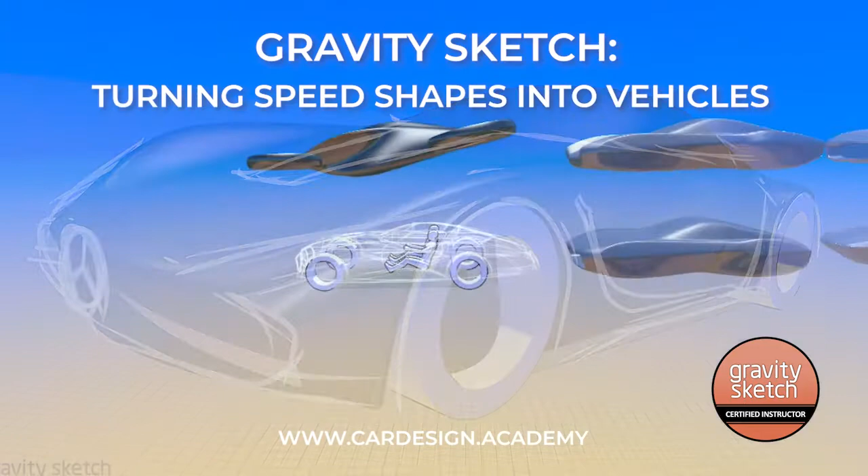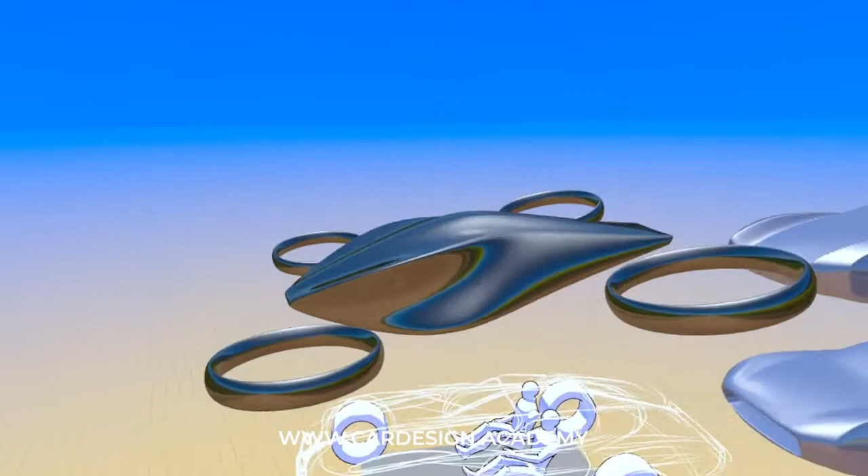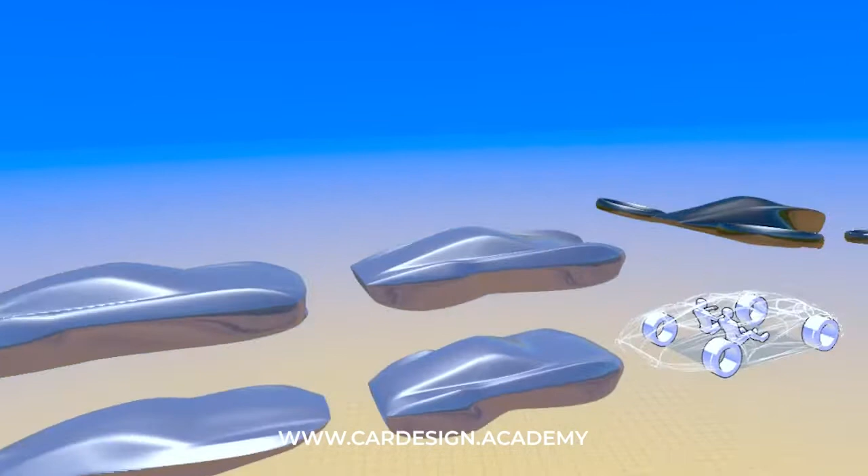As you can see here, in my earlier demos, I did a series of form studies based around this 3D sketch of a future Mercedes SL Coupe, also incorporating a form study I did for this manned aerial quadcopter. I started with form studies based on the original sketch, which have a very familiar automotive look, then started incorporating some of the form studies I did for the aerial vehicles, which are a bit more adventurous.

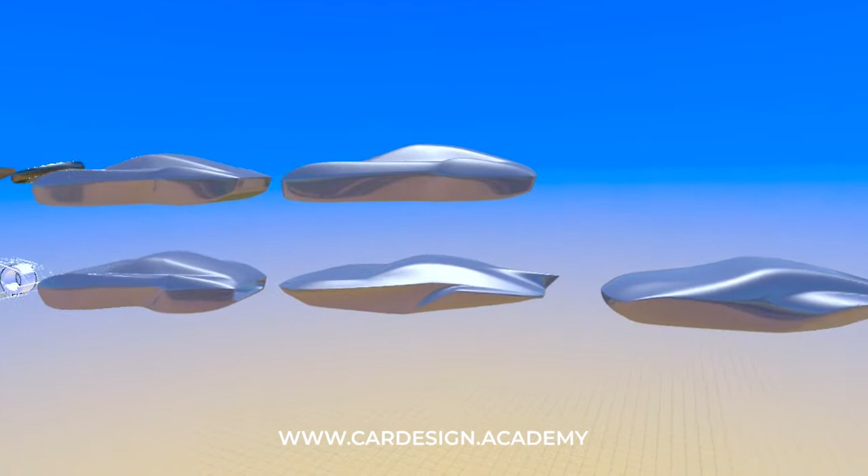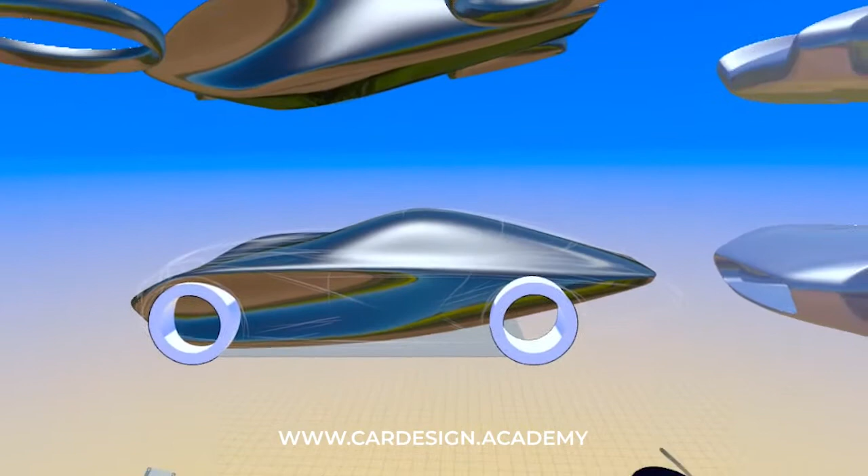I wanted to come up with something super elegant but more futuristic and innovative. So I landed on this sketch here, where I literally took the form of the aerial vehicle, my favorite of the three, and just morphed the dimensions to the sketch, so now it accommodates the two occupants of the coupe.

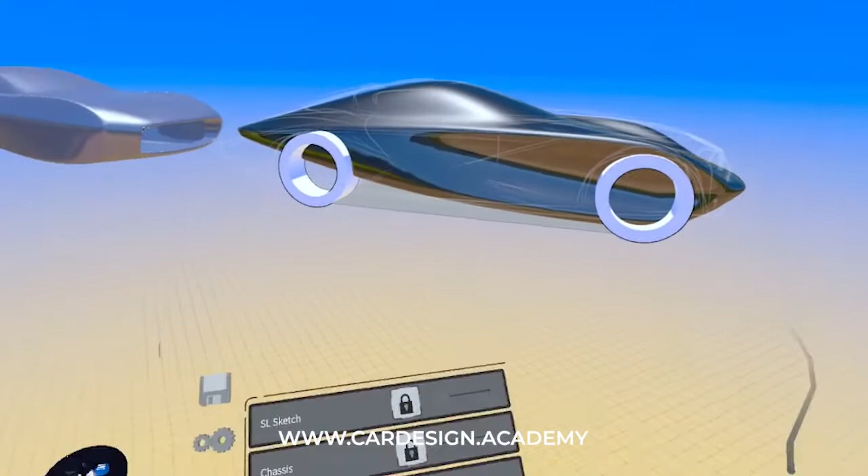In this demo today, I'm going to show you how I'll develop this into a full, complete vehicle, starting with how we control the wheel arches. I'm going to turn off the form studies and turn off the original sketch layer. As you can see, I've got this very simple, very elegant shape.

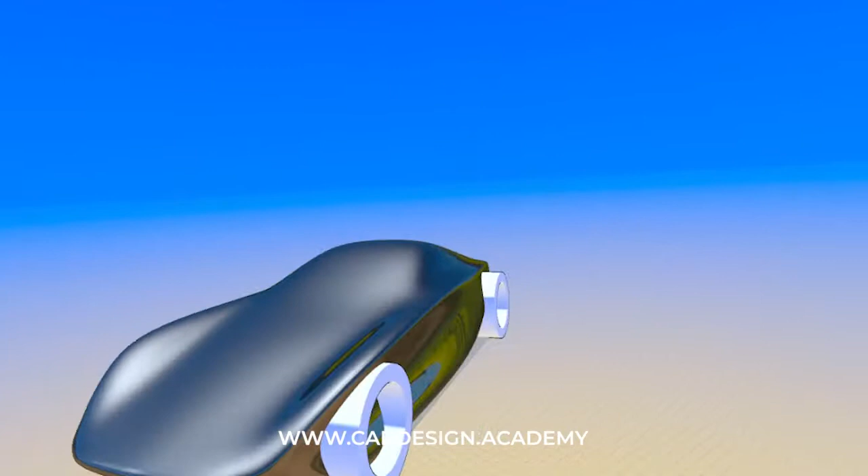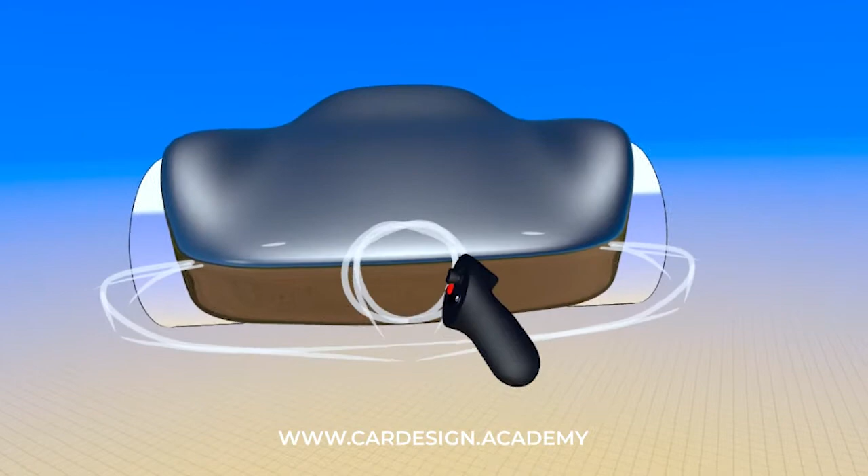So what I'm going to do now is start to sketch out the next steps in this design. First thing I want to do is sketch out some of the front end and rear end details, maybe also figure out the shape of the glass, the DLO. Being that this is going to be an SL concept, I'm going to make the three-pointed star very prominent on the front end.

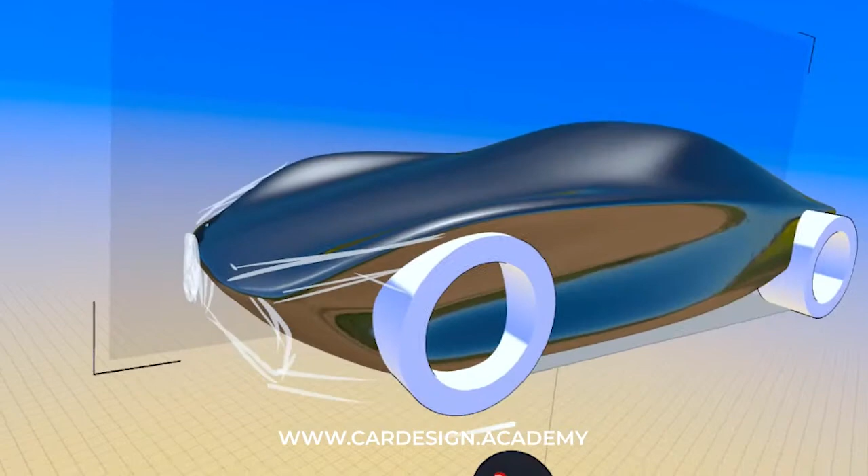And then just start to sketch out the form of the vehicle and how the wheel arches come together.

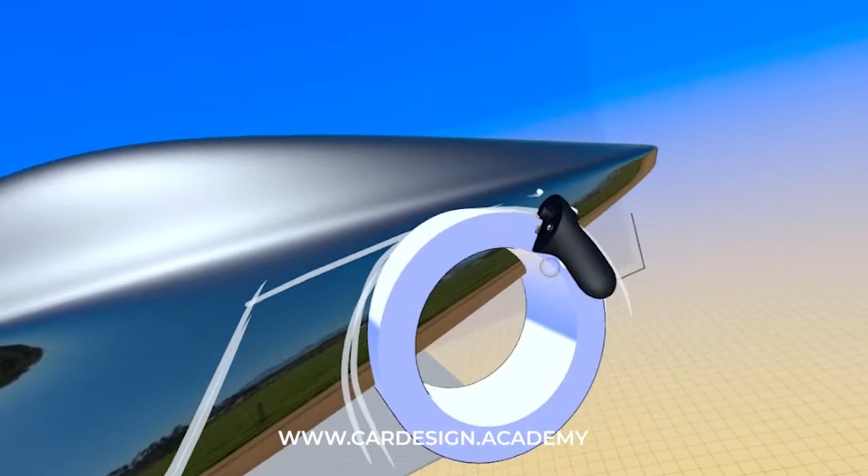There's a couple of different ways we can go about incorporating wheel forms. One is a blended approach where they're part of this original form, or they could be separate fender forms that lead into vents or scoops or something like that. So I'm going to try both approaches, and you can see a couple of different ways we can go about this.

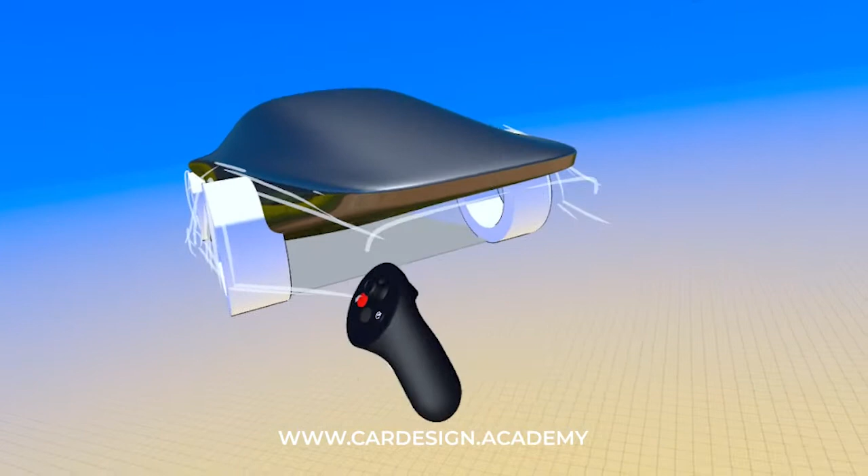So I'm just kind of sketching out what the remainder of this body looks like, and as you can see, I'm also thinking about how to maybe correct the form here.

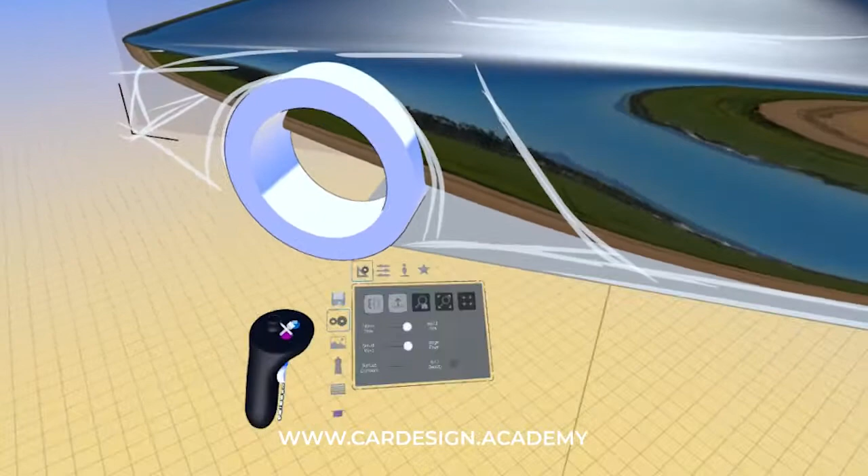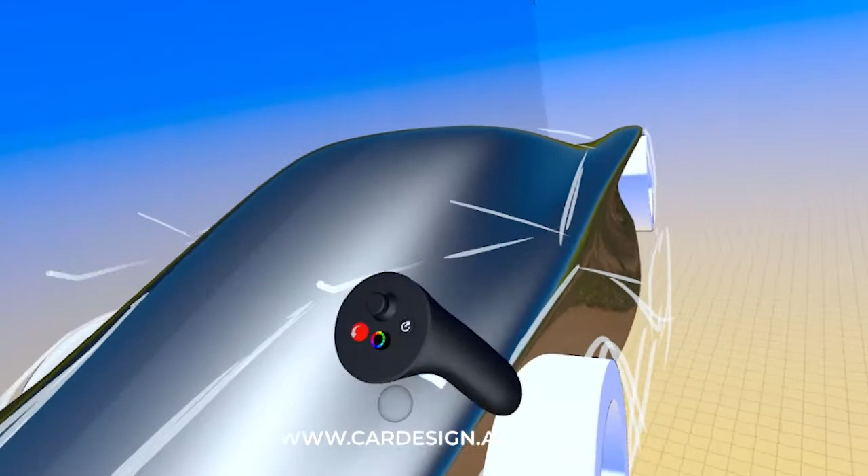I'm also going to think about the graphics of the glass, and I want to come up with something very progressive. What I may do is go back to that aerial vehicle and develop a pair of concepts, an aerial version and a land version. So I'm thinking about this very futuristic, all-glass roof.

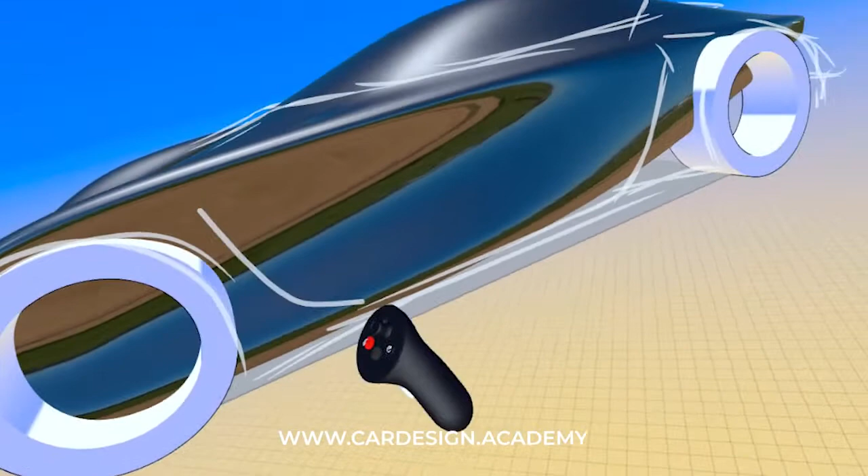So we might end up having an extractor detail here. We'll see. Maybe we'll try both approaches - a blended approach, and then more of an add-on approach.

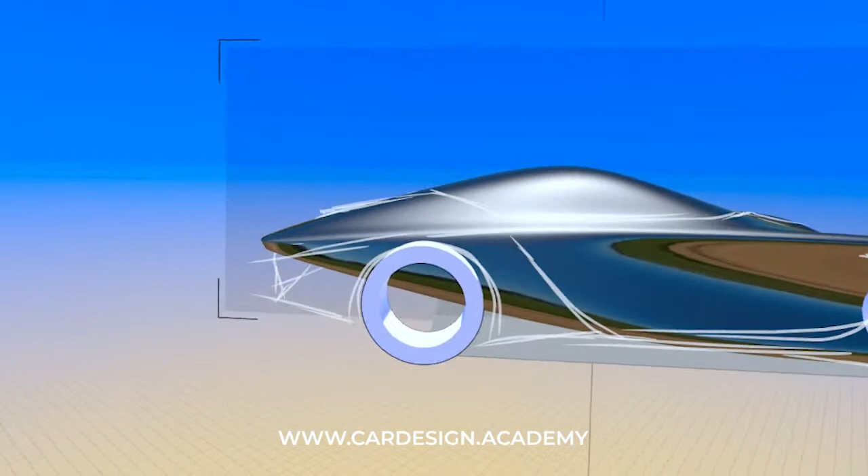Now by building out the rear corner of the car, you can see that right now with the form study, it has this kind of pinched look to it - it looks like it's not quite settled on the ground. Adding the rear quarter bodywork is really going to help settle that down.

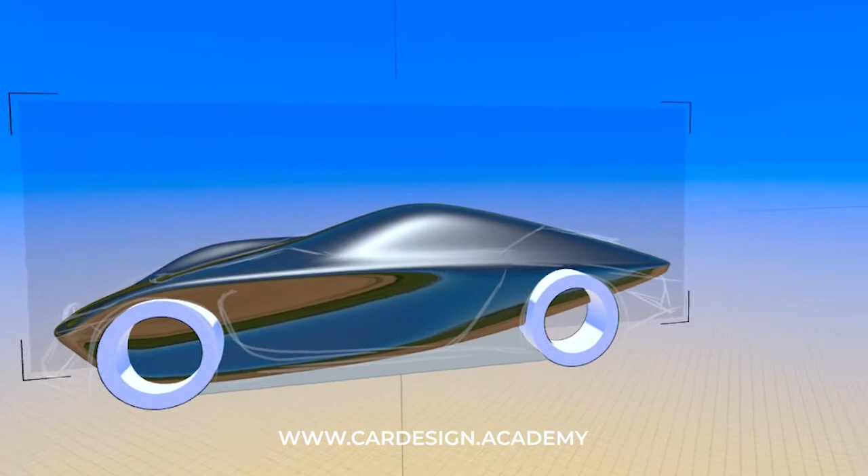Now that I have this second sketch, I'm going to turn the opacity way down. So what we're going to do now is focus on the wheel arches. The wheel arches are really important in how the car sits on the road - it's really central to setting up the proper stance and proportioning.

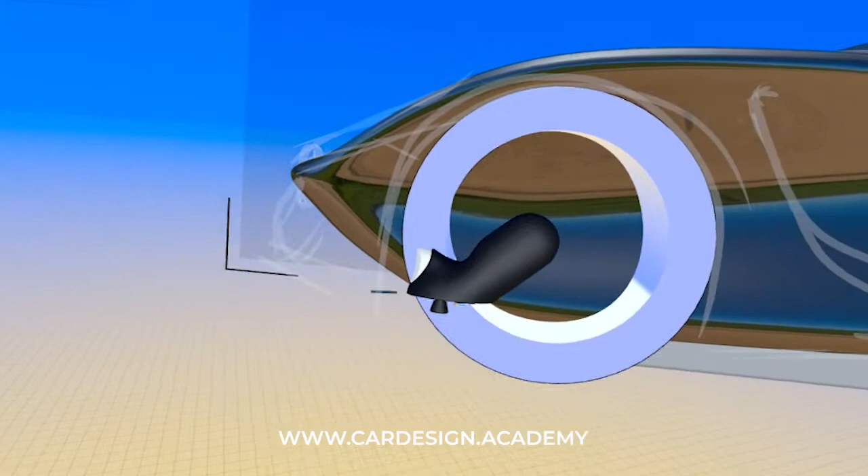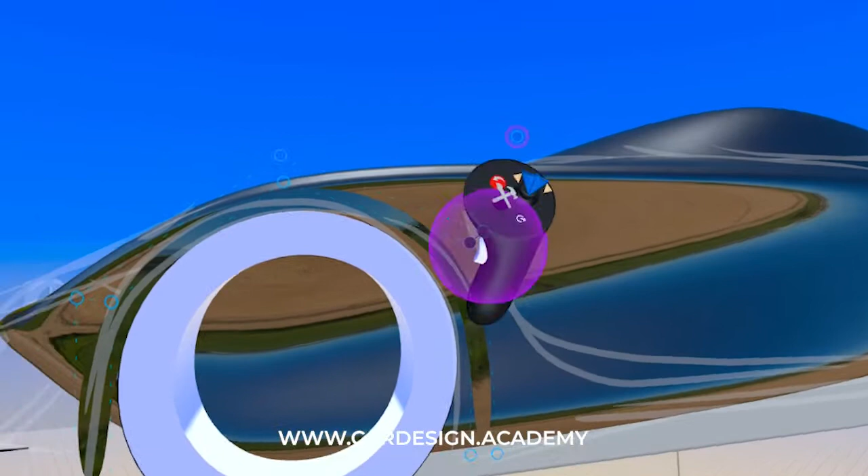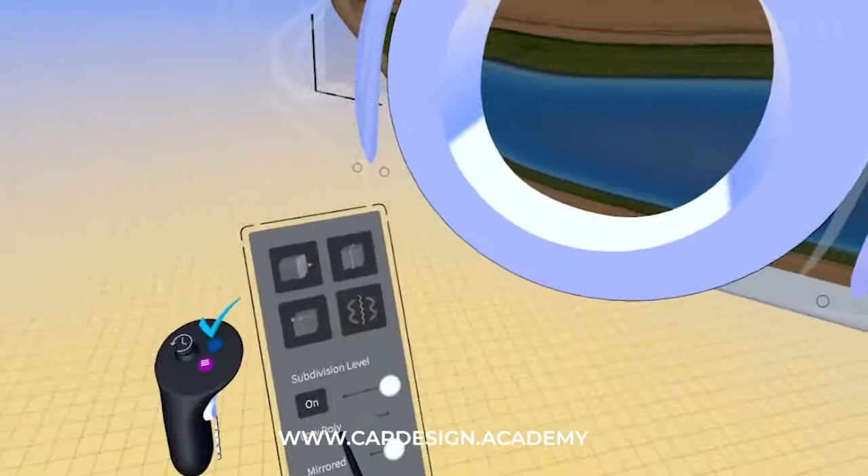So what I like to do is start with a simple sub-D ribbon. I have my sub-D turned on in ribbon stroke, point mode, and I'm going to start by building a small wheel flare around the tire, getting it into the right position. Here I'm going to give it a different color so you can see it more easily. In low poly mode, you can see it's only got 5 sides to it, and I'm using the thumb joystick to control the distance between those points.

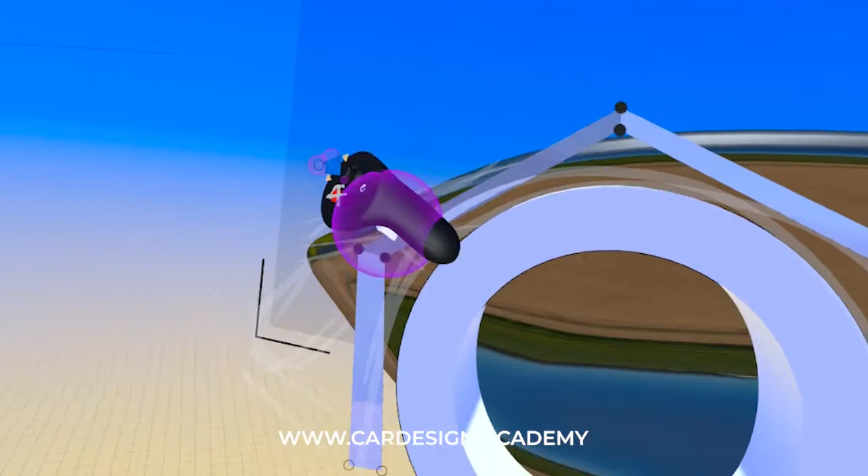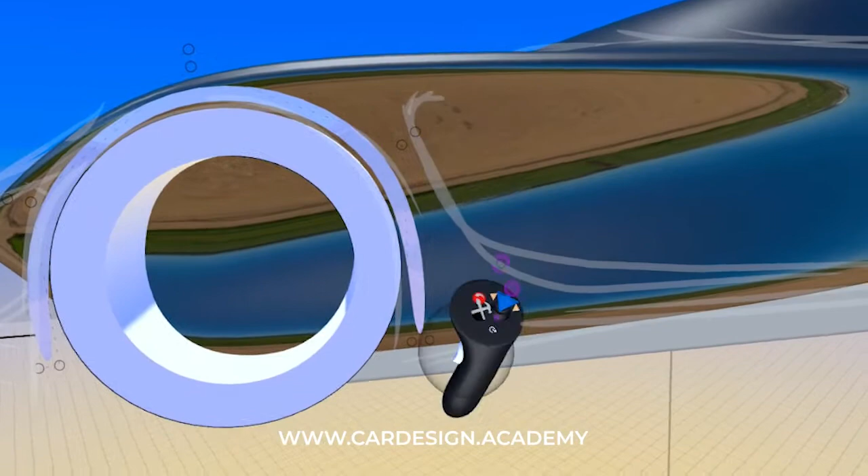I'm going to make sure that the top of the wheel arch is fairly flush to the tire face, but then it kind of rolls under. It's how most cars are set up. So you can see now when I turn it on smooth view, it's got this very consistent round shape.

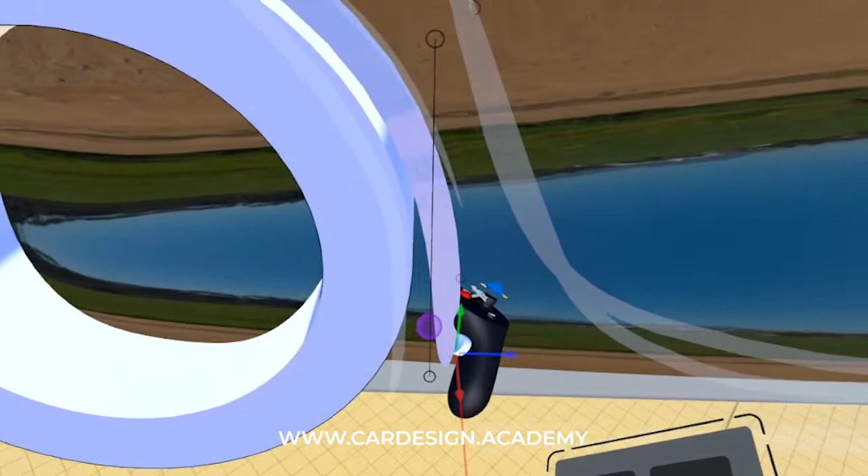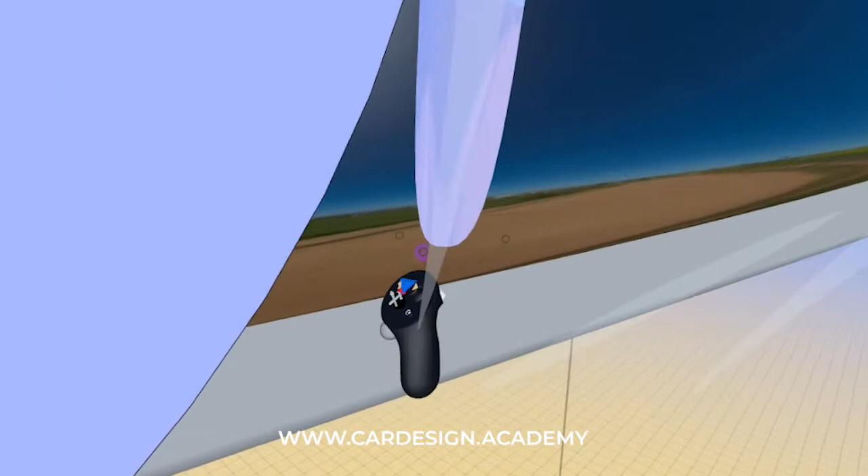And it tumbles in nicely. I'm also going to add a hem flange. So I'm going to do auto select loops, and I'm just going to extrude a small surface inward and put an edge on that. So now we have this nice hemmed edge.

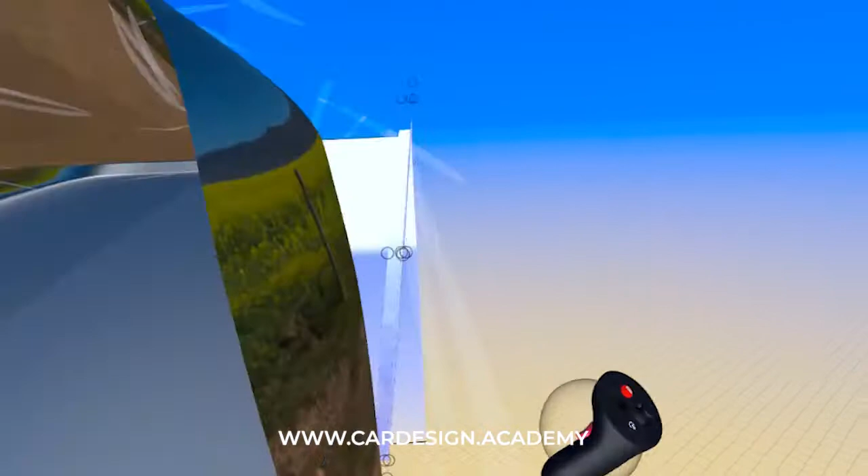So I'm going to take that shape, duplicate it, and send it to the rear wheel. Now the front and the rear never quite match in real life, so what I'm probably going to do is tuck in the rear a bit more and maybe pull out the front slightly, so that a little bit more of the rear tire is exposed.

I'm going to go ahead and turn that back to body color. And you can see I have this mirrored. So right now I'm approaching this as separate volumes, which I will somehow integrate into the body later.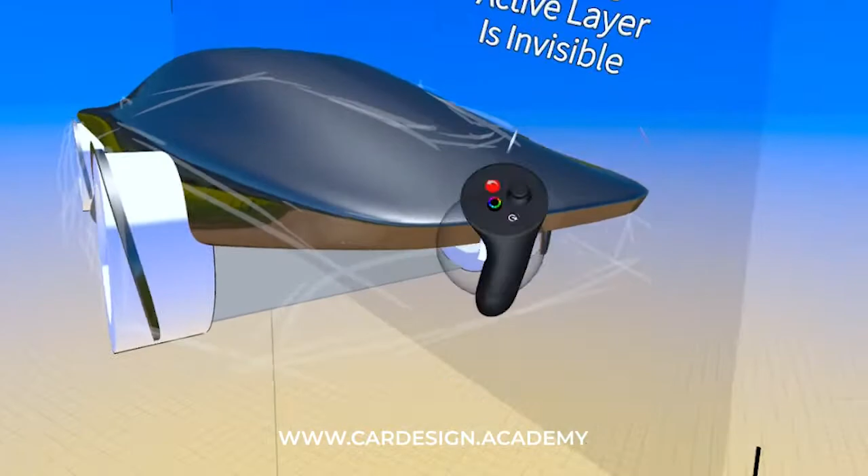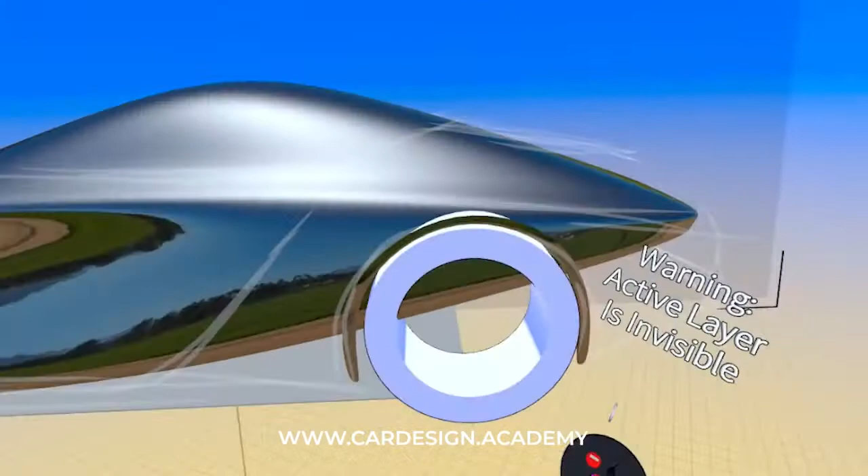Now, one thing I do need to do with the original form is bring the back end down a little bit more, because we're going to build out this rear end as well. So let's start with this rear haunch. This is going to really help to fill out the proportion of the vehicle.

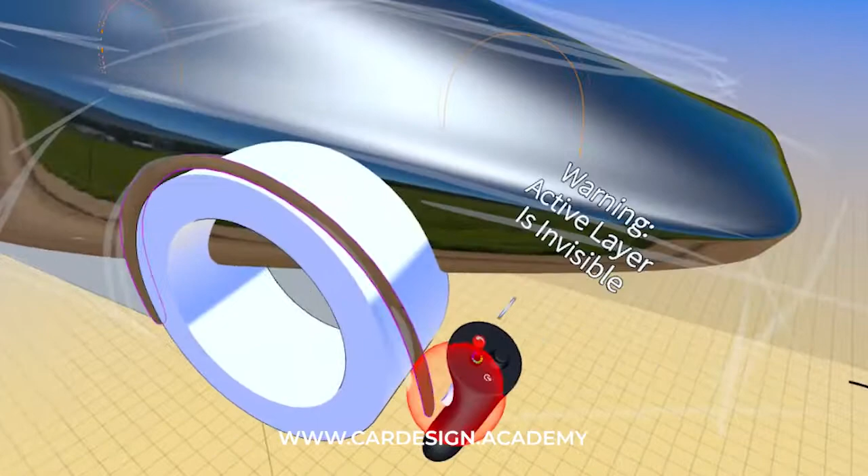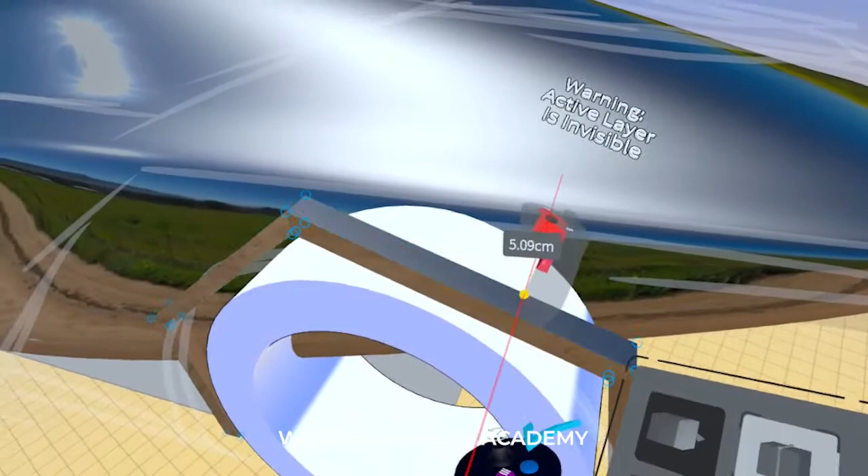What I'm going to do is turn everything into... I'll just leave it this way. I'm going to turn this to low poly view so you can kind of see what I'm doing, and I'm going to start with just extruding inward using auto select loops, and then just start to stretch out the body from there. I'm going to work polygonally till I have everything how I want it.

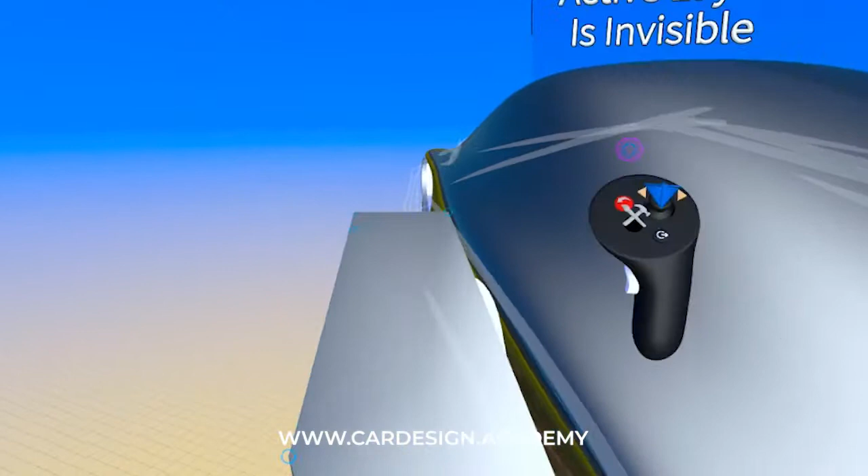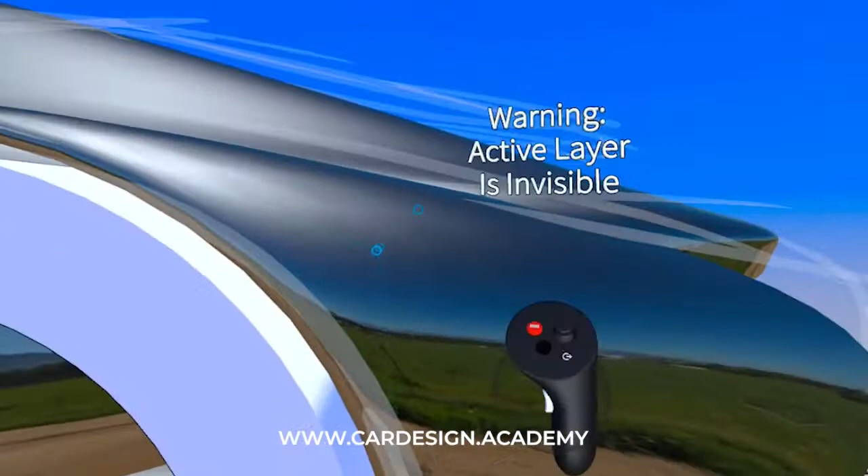I'm going to put another edge on this wheel flare. So you can see that's an extremely lean body over those wheels. So I'll try and do the same on the front. I'm going to try to bring it out to this corner here.

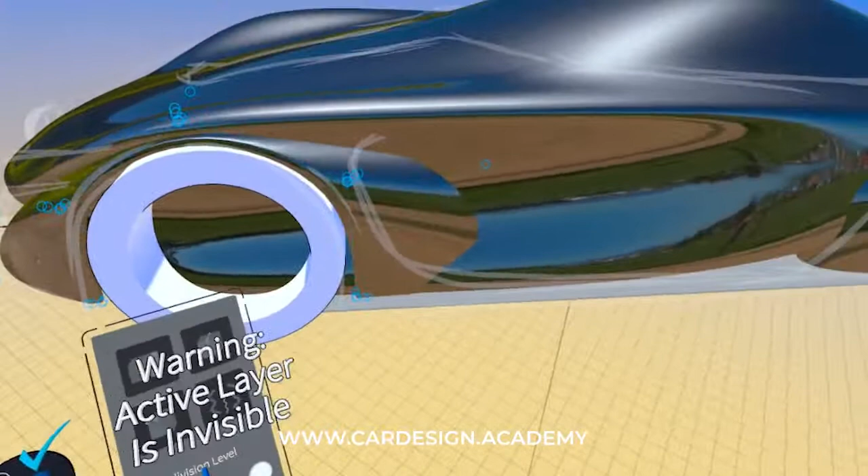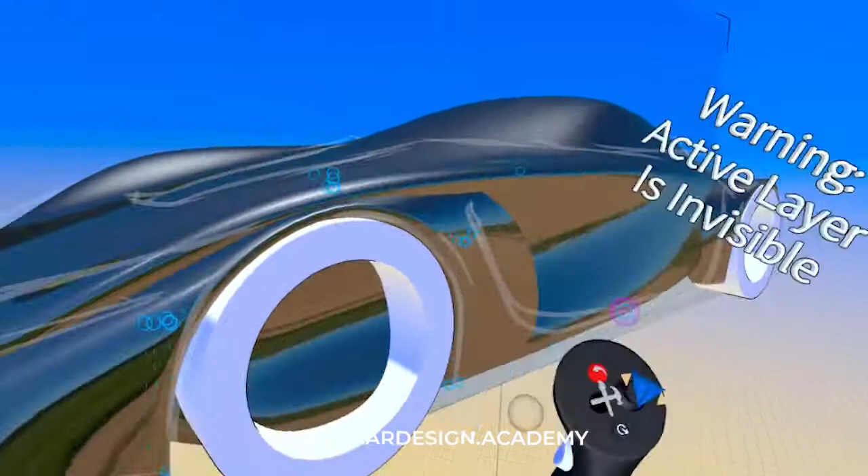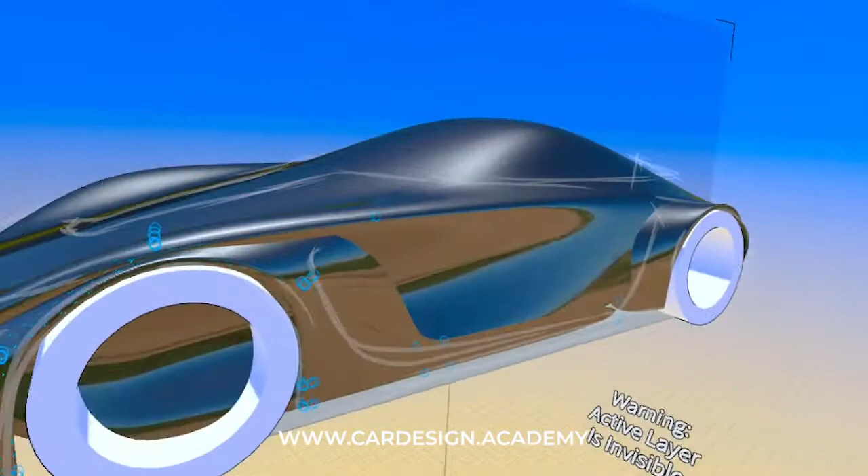So this is a good way to just very quickly understand the volumes that you're working to. But you can see it's going to be messy. So you can see I could form like a vent in here, perhaps.

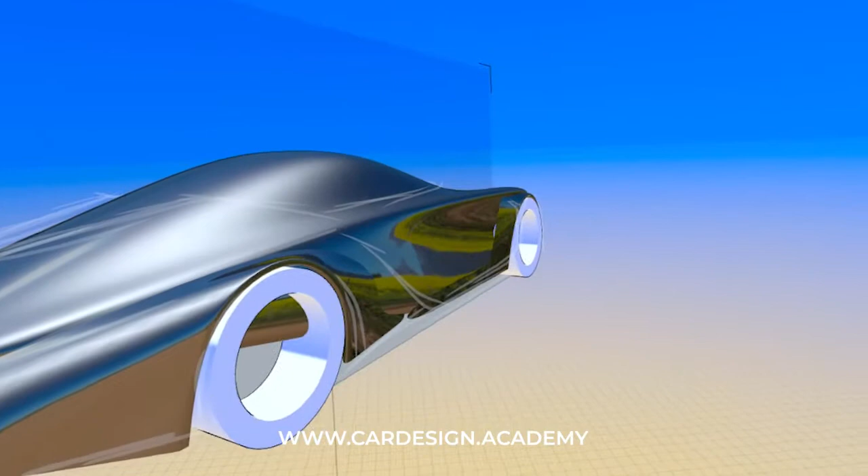Okay, so it's starting to fill itself out a bit more, where the car has a little bit more of a planted look. But as you can see, the transitions between the body and the tires, and the wheel openings, are quite messy at the moment.

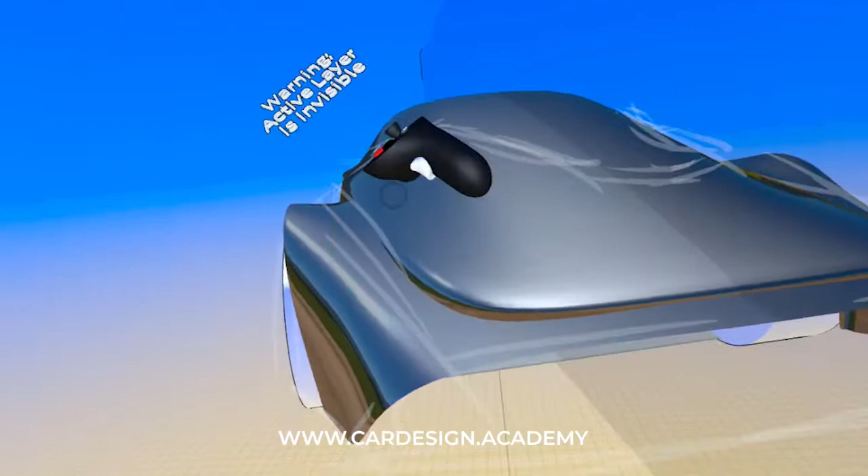But one thing that it is telling me is that the body is too low in the rear. I need to actually bring it back up a little bit, so that I can get a little bit more read on these wheel openings.

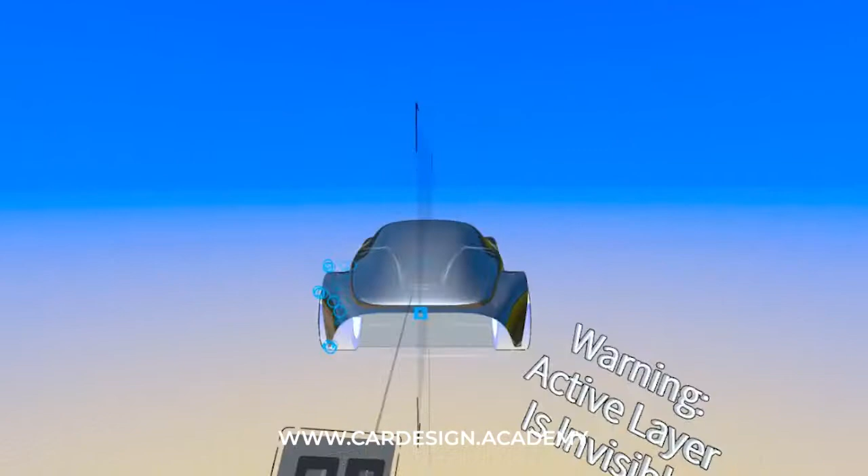That feels a little bit more planted. Doesn't look quite like it's being sat on in the rear, but that's starting to be a very sporty, elegant silhouette.

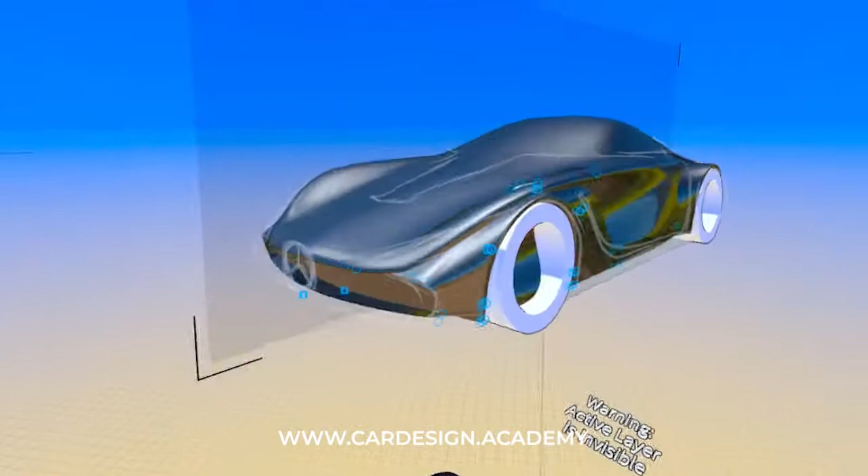But the mouth is looking a little fishy, so maybe bring the chin in a little bit, so it's got a little more of a shark nose to it. Bring it down a little bit as well.

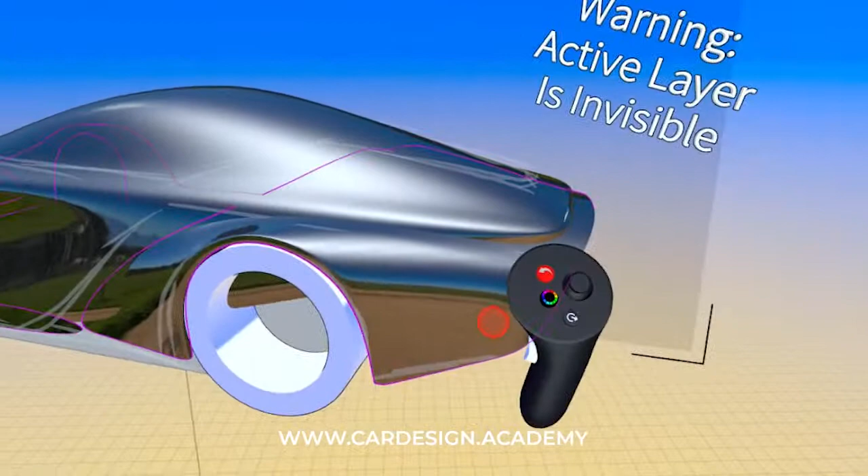So working this way in sections is a really great way to just lay out very quickly the volumes, so that later on you can go in and do a more blended approach.

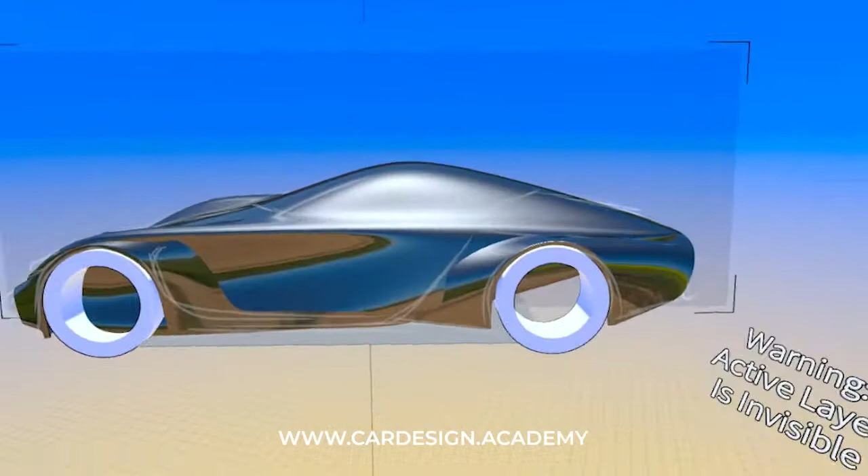So this is a great quick study on how to start to set up the relationship of the wheels to the body, just using these separate components. In the next demo, we will start to blend these elements together into a singular vehicle shape. Thanks for watching.